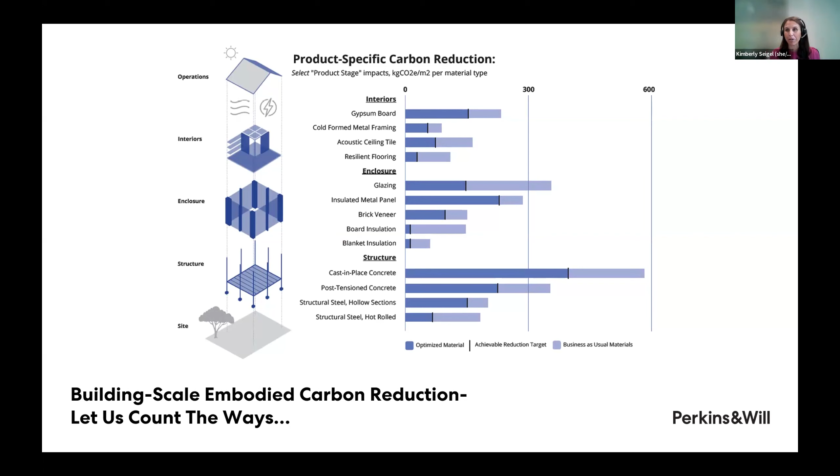And if you're pursuing a whole building life cycle assessment, you'll also need to understand not only material types, but quantities. So once again, just emphasizing all the different varieties and flavors of data and how it appears when it comes to embodied carbon reduction. And many think that embodied carbon reduction boils down to the products being specified. And to some extent, it absolutely is. But the reality is that the process commences well before materials are specified.

So like most things on a campus level, and I'm sure many of you on the call can relate to this, decisions are made involving a long process. They are involving a lot of parties. And the more available data that there is, the more informed those results will be. So it's easiest to make embodied carbon reduction a reality the earlier you start talking about objectives and goals. But since I've just outlined how embodied carbon reduction is predicated on data, my advice is get familiar with data and ranges so that you as a group can collectively and clearly define what reduction really means to you and your campus. And then you can eventually get there.

And so this is my last slide. I just want to emphasize while data is key, I do think it's best exemplified with a case study. So I'm going to hand it over to Dano, who is going to wow us with a case study, which will hopefully drive home this point. So Dano, I'll stop sharing. Thank you.

Thanks so much, Kimberly. I didn't know you were going to tee it up that way. Now I feel like there's a lot of pressure. I'm sure you'll introduce Keith well. So

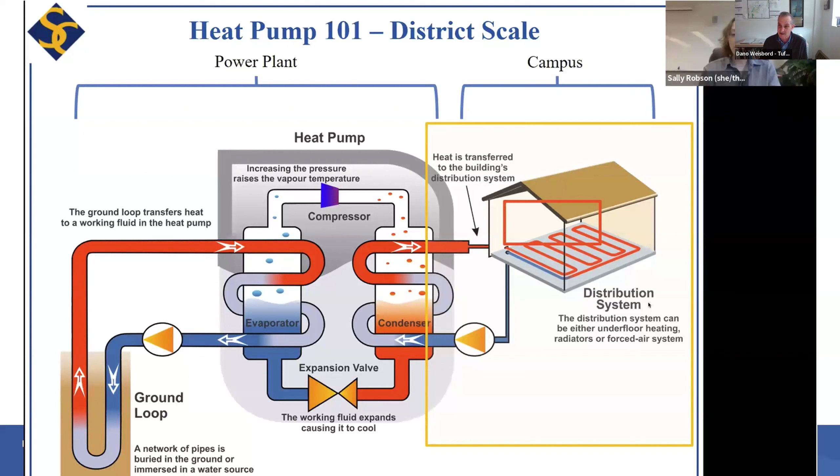And in fact, here's Sally up in the upper right-hand corner explaining how a heat pump works to our board of trustees. The great thing about doing that is that the board didn't ask if this is relevant to teaching and learning, if it's relevant to our students and faculty, because we were able to show them, we didn't have to tell them. So there's a lot that goes into that.

But let me just hop on to the second piece, which is sense of identity. Smith, like many institutions, is obsessed with its own history. And so when you can connect something new to something old, that really has a lot of value. And when we were looking at rebuilding our entire district energy system, we found this photo and a series of photos like it on the left, in which we discovered that Shepley Bulfinch had actually designed and engineered our district energy system.

Shepley Bulfinch at that time was helping us redesign this building, which is the Neilson Library. And so there was a connection here in 1947 between a new district energy system and an architecture firm that we were working with right now. Furthermore, in thinking about that new energy system, this on the right is an 1896 coal boiler house that was part of the Miss Capen's School for Girls. And that boiler house has now become part of phase 1 of the geothermal electrification, and that's where the new heat pumps are housed. So we have an 1896 boiler house that is now a 2024 heat pump house.

And we had students actually go in, here are our two students, Maya and Jess, in the Shepley Bulfinch archives, sort of unearthing more information about that 1947 steam heat system. And they went on to do a project. This is in 2019. You can see we used 2019 dollars, where they said, gee, in 1946, in 2019 dollars, the cost of that system was $50 million. And if we actually escalated that on a per square foot basis, we would be looking at a $70 million project. And it really helped our board putting this into historical context.

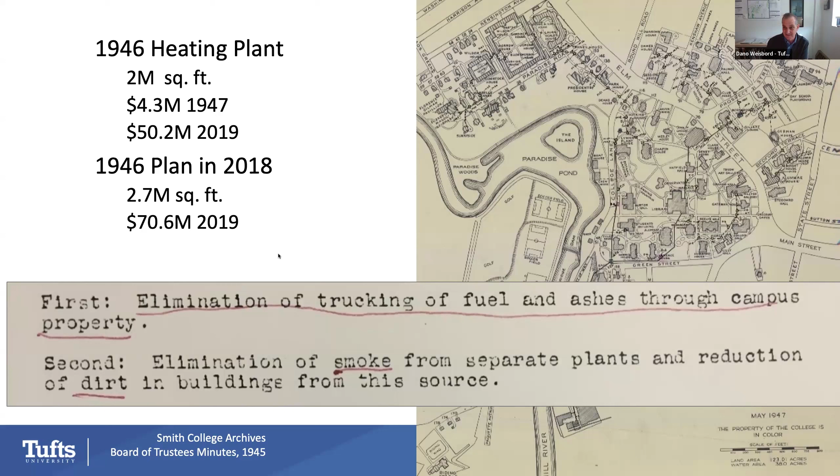Furthermore, they discovered when we unsealed the trustees' minutes from the meeting in 1945, where they approved a plan, that they did it not just for financial reasons, but to eliminate the trucking of fuel and ash through campus and the elimination of smoke from separate plants and the reduction of dirt. So it was a revelation that in 1947, they had built this new plant for pollution reasons, not just for financial reasons. And here we were doing that again. So there were ways in which we brought the planning and the design of this and the finances of this all together and sort of showed the board that this was relevant from a teaching, learning, and research standpoint. So that's a quick version of that.

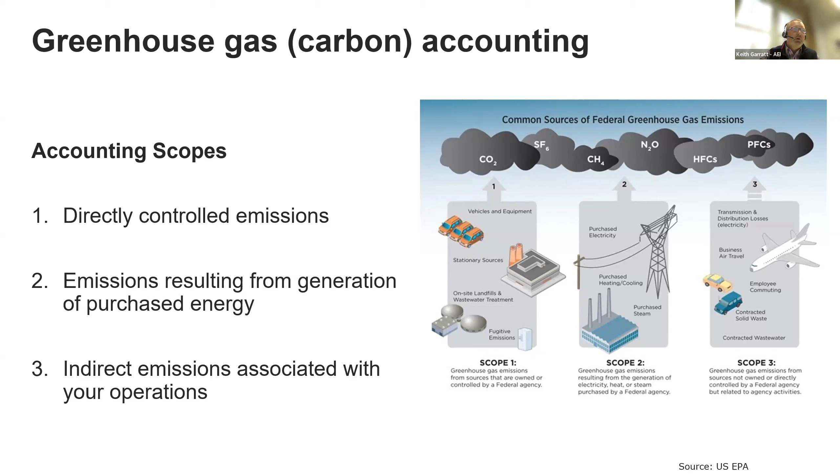So we really like to focus on scope 1. This is just another way of showing that that's really in your control. Upstream are the things the utilities are doing, downstream are some of the activities, but the bang for the buck happens here on scope 1.

Further driving that home, looking at possible ways to get greenhouse gas emission reductions. There are several. If we think about facility energy, renewable energy, and electric vehicles, that falls into the buckets of scope 1, 2, and 3. You'll see carbon offsets on this screen, which is really more of an investment strategy to help you get to net zero. But if you truly want to be carbon-free, zero emission on your campus, you've got to really tackle the scope 1 emissions, and ultimately then you wouldn't need the carbon offset.

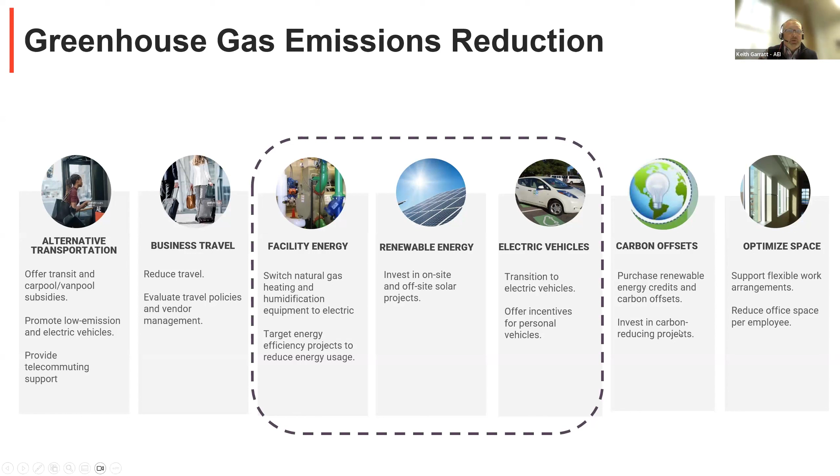So we spend a lot of time in the middle of the screen. Having said that, when we look at the life cycle of a building, and this goes back to some of the first presentation that Kimberly did, the embodied carbon makes up about 38% of the total lifetime emissions of a building.

But this happens early. In terms of the timeline, this happens at the beginning of the building's life, when the materials are being put together, the building's being built. The longer term impacts of carbon from the building come from the operations, and then for us, that falls into a lot of the cooling, electricity, and heating of those buildings.

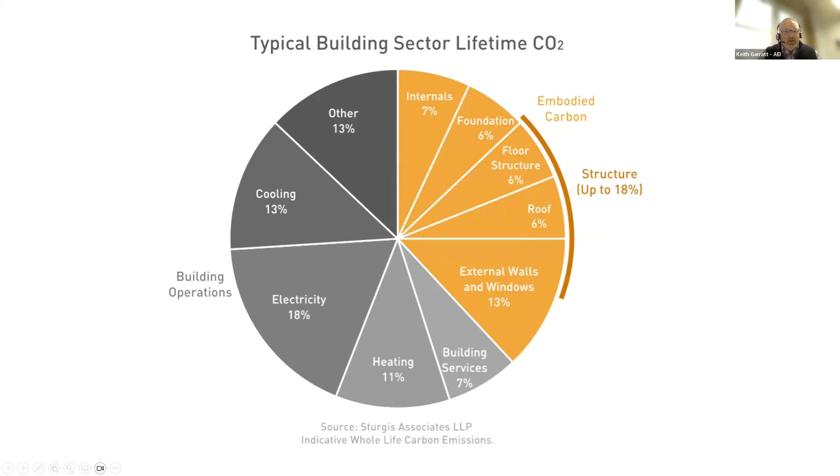We like to look at both, but we're dealing with campuses that have a tremendous number of existing buildings. So the opportunities for making large changes in embodied carbon in existing buildings aren't as impactful.

Going to what Dano talked about in terms of strategic alignment, when we look at these larger planning efforts for campuses, we really do like to align with the thinking on the campus. So right away, we want to talk about things like climate modeling and what is the campus's view of climate change model. And there's lots of different models out there. So which is the one that we want to agree to use for our master plan?

What are the plans for growth for that campus? Are there any existing energy master plans in place? And you heard with Smith, the idea that they converted from steam to hot water. That happens a lot. So what's that strategy for the campus distribution? And ultimately, we start looking for places, and I'll talk about this a little bit more later, for combined heating and cooling. And that's really where we can get the benefit.

And then we want to talk about things like renewable energy. What's the strategy for that? Is the campus open to energy storage? Can we put tanks on the campus and start to help us really optimize the solution? So when we understand that as a strategic master planning level, then we start looking at the buildings.

New buildings gets to be, I'll say, a little bit easier. Define the green design standards. There's lots now. Building electrification, especially in this state with the way the code is going, is really being pushed there for new construction. And ultimately, we're looking to get to zero energy buildings.

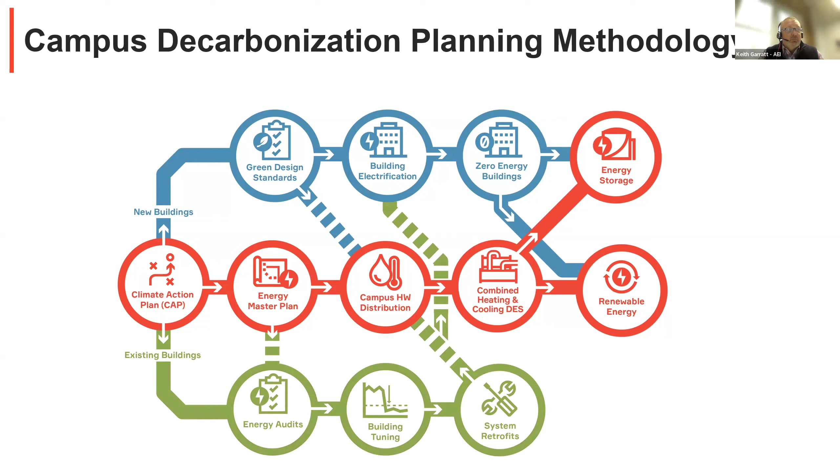Where it gets a little bit more complicated is on the existing building side. What do we do with this stock of buildings? So that's, for us, it's a lot of tuning of those buildings, auditing those buildings, and trying to improve the energy performance, and not only the energy, but also the systems. If we're talking about converting a campus from steam to hot water, there's a lot of conversion and retrofit that may have to happen in some of those buildings to make them ready to accept the hot water. So what does that look like, and how does that factor in?

So in doing so, we like to look at - we know that if we can improve the energy performance of a building, we're going to improve the greenhouse gas emissions from that building. Over time, as a building operates, its energy use will go up. The envelope ages, the systems age, the performance of the building changes as the building use changes. So how do we get that back in line, and then not only in line with where it should be, but how do we improve upon it?

Whether that's retro-commissioning, a large part of this is looking for energy conservation measures that can be implemented fairly aggressively to help start bringing that energy usage down, and in doing so, reduce the greenhouse gas. If we do this on a single building on a campus, that makes an impact. If we can do this on multiple buildings, then we really are making changes that a central energy system can start to see, and you can start to downsize that central energy system, and then also look for ways to improve the performance of that.

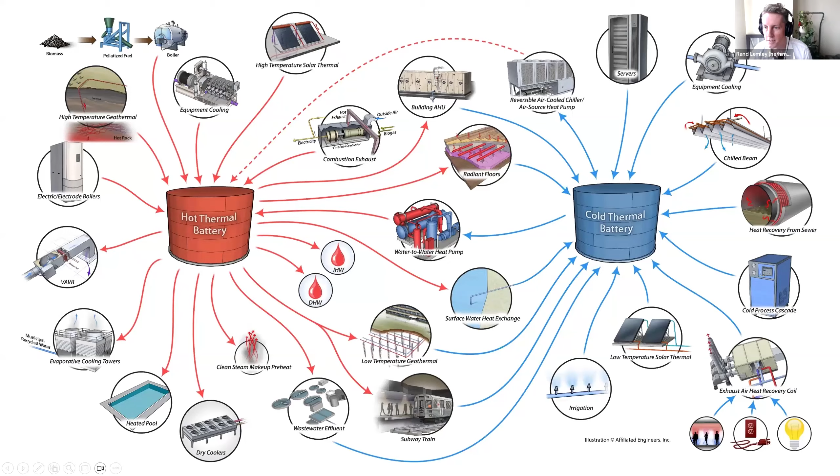Yeah, so I think the first question I have kind of relates to what Dano and Kimberly were talking about with creating goals, and this idea around stewardship, connecting the present and the future of a campus to its history. What I'm wondering - what kinds of goals do you see based on what data we have available as realistic, and how can designers help institutions determine those realistic goals for a campus?

Who do you want to tackle that first, Dano or me? Who's feeling up to it? I mean, I'm more than happy to give it to you, sure, Kimberly. I have plenty of opinions.

So it's a great question. Maybe I can just speak from it more generally, and then Dano, you can fill in the blanks with specific campus experience. I think it's really interesting, right? There's this almost like zeitgeist right now to tackle sustainability and carbon reduction. It's the kind of thing we've seen over the last two decades where there's just this groundswell of support.